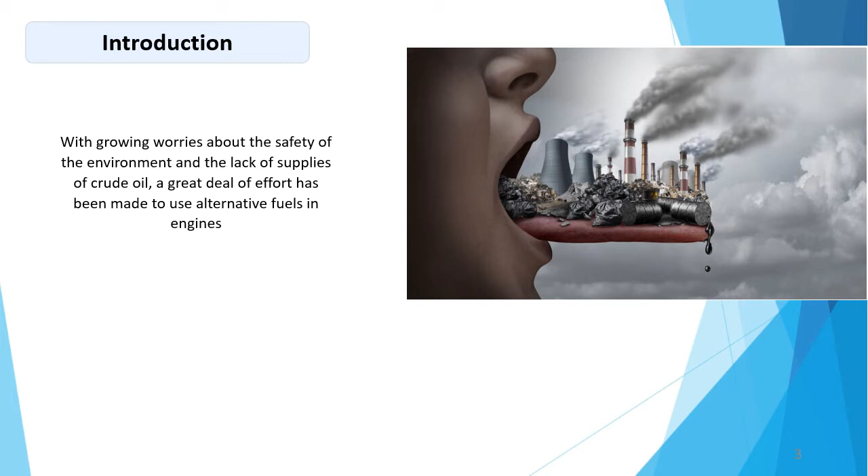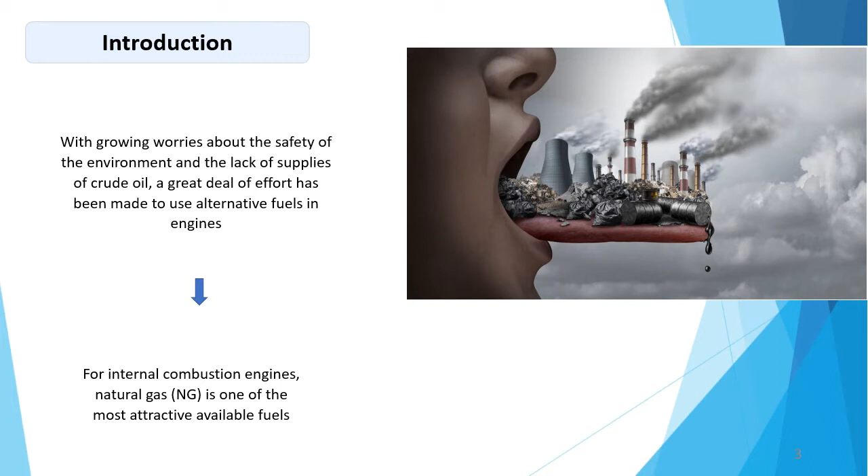We start with the introduction. With growing worries about the safety of the environment and the lack of supplies of crude oil, a great deal of effort has been made to use alternative fuels in engines. For internal combustion engines, natural gas is one of the most attractive available fuels. The dual fuel concept is an effective way for its use.

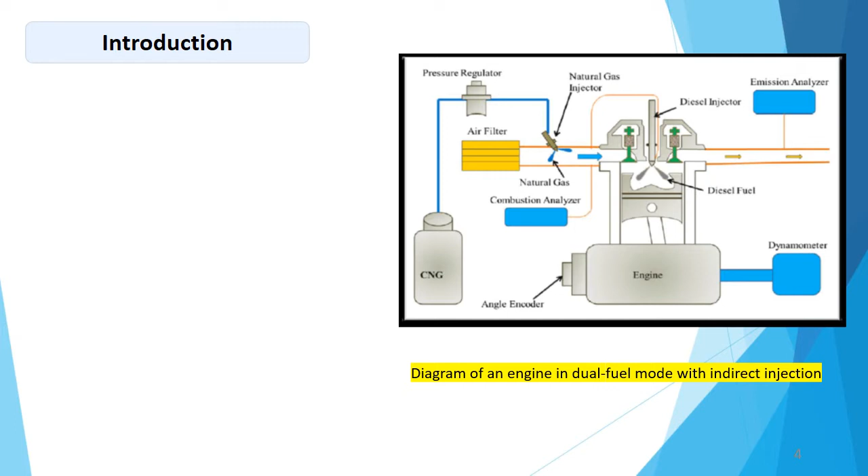In dual-fuel engines, gaseous fuel is usually injected into the cylinder with the intake air and is compressed in the same manner as in a conventional diesel engine. Owing to its high autoignition temperature, the gaseous fuel mixture doesn't autoignite. Near the end of the compression stroke, a small amount of liquid high cetane fuel, commonly referred to as the pilot, in this case the diesel fuel, is injected to ignite the heated gaseous mixture.

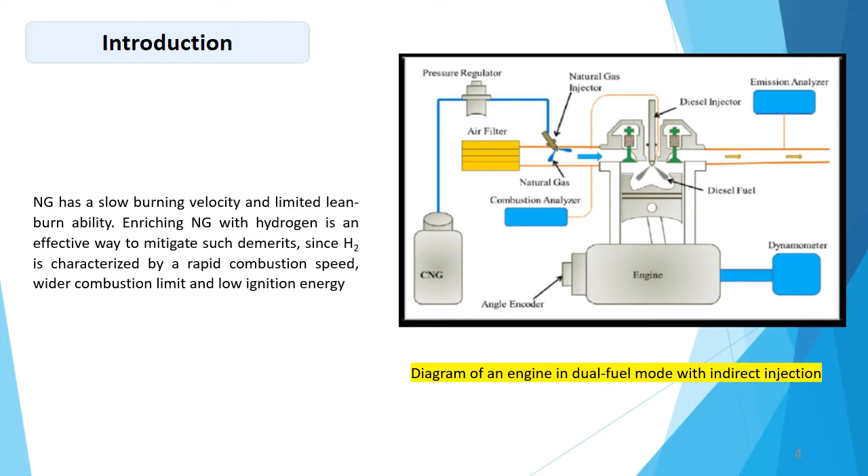Natural gas has a slow burning velocity and limited lean burnability. Enriching natural gas with hydrogen is an effective way to mitigate such demerits, since hydrogen is characterized by rapid combustion speed, wider combustion limit, and low ignition energy. For high engine load operation, the engine risks going through a hazardous knocking regime.

It is usually admitted that knock in combustion is created from the spontaneous ignition of a portion of unburned end gas in front of the flame front before it is reached by it, depending principally on the temperature and pressure evolution of the end gas, in addition to the rate of flame development.

In this context, the current study explores the effect of natural gas enrichment with high hydrogen concentrations. The hydrogen concentrations are 20, 30, 40, and 50% by volume in dual fuel mode, on combustion characteristics and knock. Combustion characteristics are obtained for four engine loads, that is 20%, 40%, 60%, and 80%.

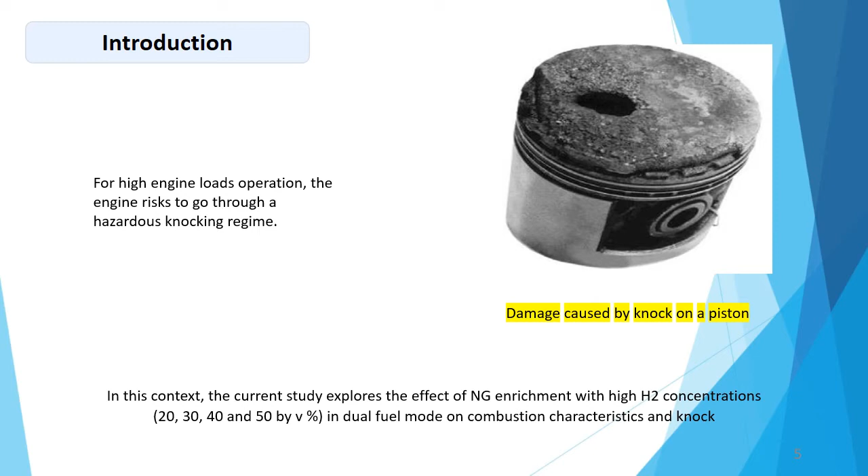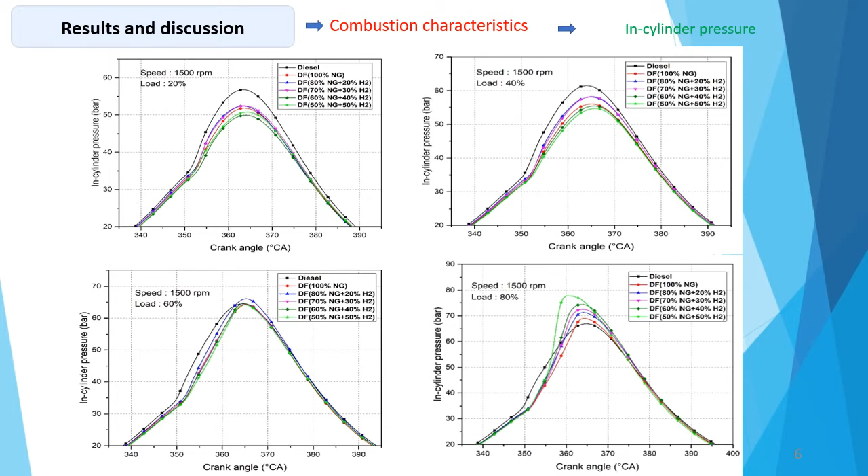Therefore, at moderate and high loads, adding hydrogen to natural gas resulted in a higher pressure peak relative to the pure natural gas case. This latter occurs progressively closer to top dead center (TDC). This is explainable by the high diffusion speed of hydrogen that enhances the mixing quality, and a higher heat release rate during the rapid premixed combustion period under dual fuel mode relative to the diesel mode. We go to the heat release rate.

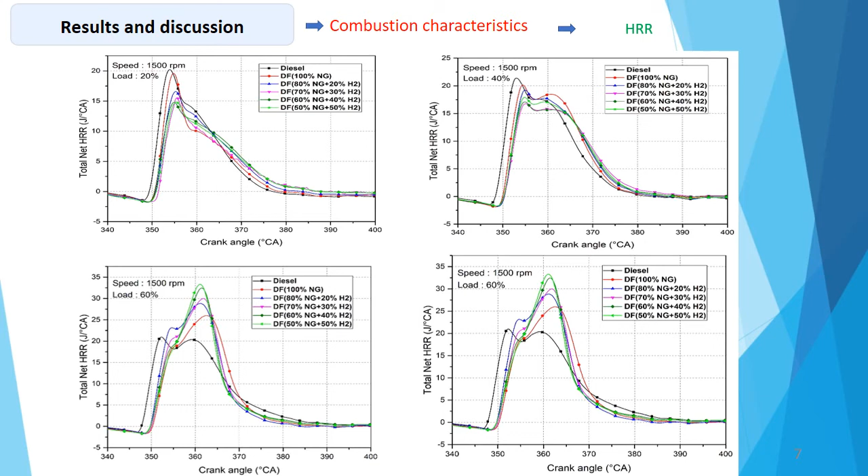However, for moderate to high engine loads, the heat release rate peak increases for hydrogen natural gas dual fuel mode in comparison with baseline natural gas mode. This is principally attributed to the improvement in gaseous fuel combustion efficiency due to rapid flame propagation and better ignitability of hydrogen. There is improved mixture quality.

The combustion duration. The figure describes the combustion duration for different engine loads with the crank angle. Combustion duration increases as the engine load increases. On the other side, higher combustion durations are observed at a given engine load under the dual fuel mode than in the diesel case, particularly at low and moderate engine loads.

However, at high loads that correspond to 80% of full load, the combustion duration becomes higher for conventional diesel compared to the dual fuel operation. Regarding the hydrogen addition to natural gas, the combustion duration is reduced for all cases. This is because hydrogen's combustion characteristics, with its rapid combustion rate and wider combustion limits, shorten the combustion duration and help to reduce the heat loss across the cylinder walls.

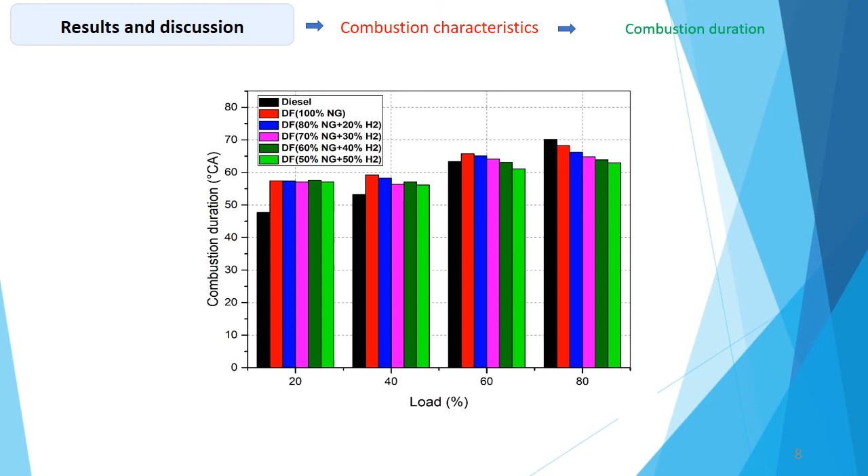Enriching natural gas with high hydrogen concentrations in a dual fuel engine is an interesting technique for improving engine combustion characteristics up to 80% load without any knock, as shown in the figure. However, beyond this load, at 90% of full engine load, the knocking phenomenon appears and rapidly reaches high intensities, as shown in this figure, and occurs before achieving the maximum output power of the diesel engine.

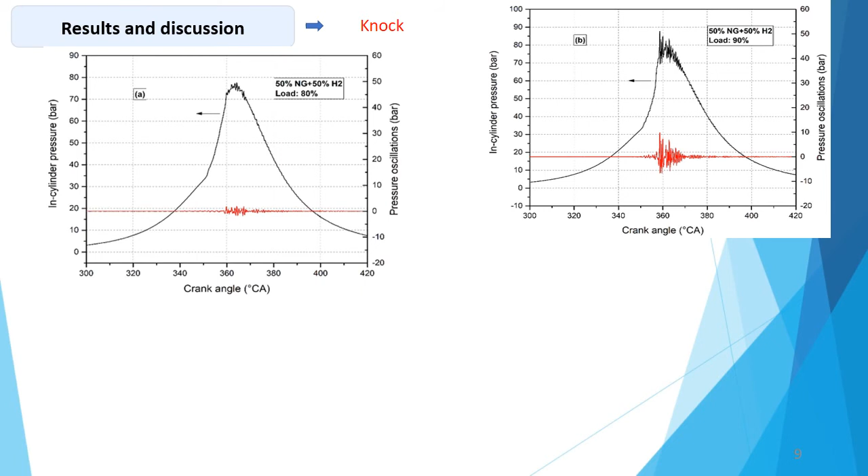In the case of pure natural gas, as shown in this figure, the engine reaches the maximum output power without knocking, as observed in the last figure. Occurrence of knock with the hydrogen addition is due to the very low methane number of hydrogen, which implies that hydrogen is extremely more vulnerable to produce knock than natural gas that is mainly composed of methane.

This can be explained by the relatively low autoignition temperature of hydrogen, 500 degrees Celsius, and 580 degrees Celsius for methane, and the high range of flammability of hydrogen. Natural gas has better knock resistance due to its relatively lower range of flammability, contrarily to hydrogen. Hydrogen also has a fast flame velocity. It also has a very short flame quenching distance relative to natural gas that enables flames to move very close to the walls of the cylinder.

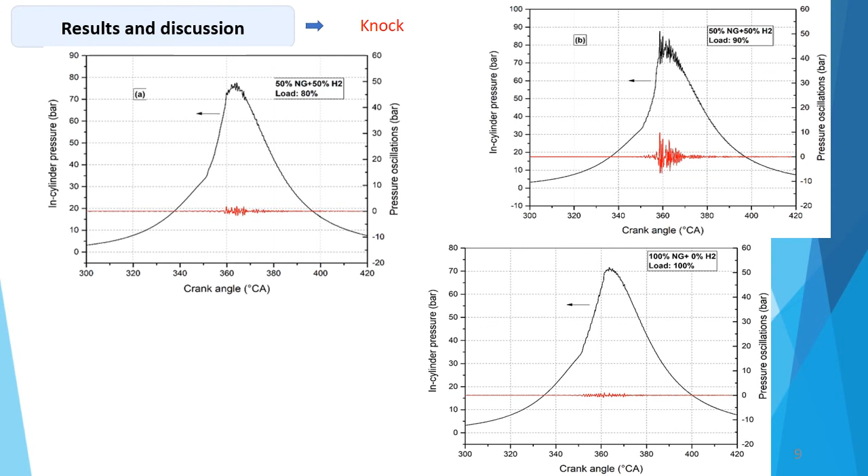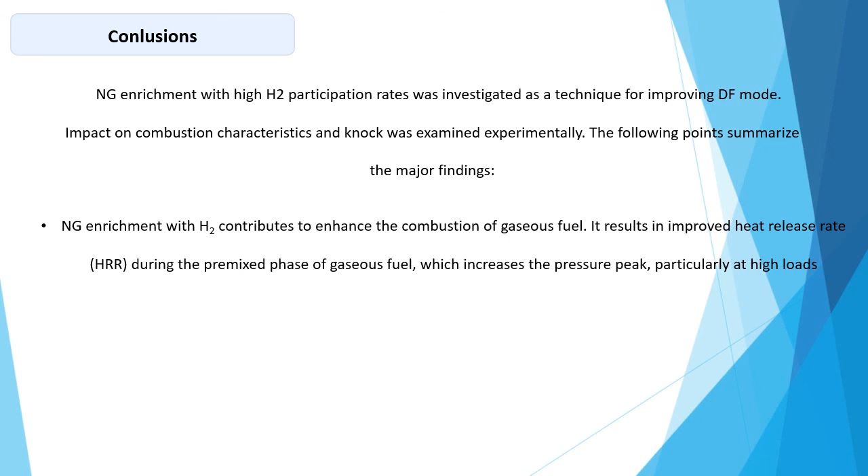We conclude the work with conclusions. Natural gas enrichment with high hydrogen participation rates was investigated as a technique for improving dual fuel mode. Impact on combustion characteristics and knock was examined experimentally. The following points summarize the major findings. Natural gas enrichment with hydrogen contributes to enhance the combustion of gaseous fuel. It results in improved heat release rate during the premixed phase of gaseous fuel, which increases the pressure peak, particularly at high loads, over 80% of engine full load.

In our case, natural gas enrichment with hydrogen generates a knock which quickly attains high intensities. Thus, it is advisable to operate the dual fuel engine with the hydrogen concentration in the safe zone from 20% to 80% engine full load in our case to prevent knock. Thank you for your attention.